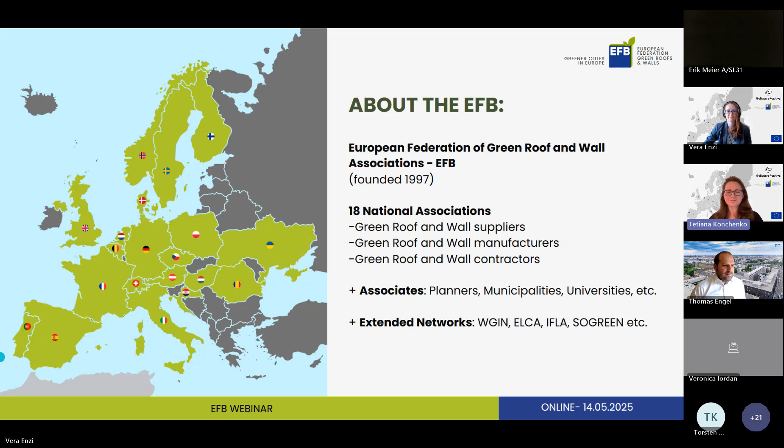Here we can see the logos of our federations. We have 19 countries represented within our networks through 18 national associations, because we have not only national but also regional associations.

Through our national members, we have access to many small and medium enterprises all around Europe. Our national associations have their members - companies, universities, municipalities, and sometimes individuals - altogether more than 1,600 members in total.

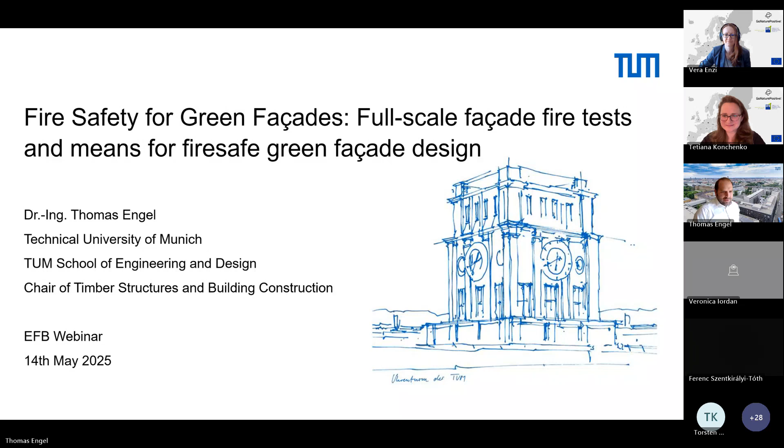Thank you, Tetiana. I hope you could all hear me well. I'm very glad to be here and to talk about our research project. We started about 3 years ago, and at that time there was only very little research in the context of fire safety for green facades. Most fire tests were made in Austria, in Vienna, and 3 years ago we started our research project. We all know that the demand for green facades is very high.

It's increasing - lots of people want to build more green, sustainable buildings, green roofs, green facades, and so on. But we also know that the most critical and serious fires usually occur in relation to the facade. For example, we all know Grenfell Tower or the fire in Valencia in 2024. So on one side we have critical fires in the context of facades, and on the other side we want green buildings - that means we want to put plants, combustible plants, on the facade.

Our question was: is it really critical, and how critical is it? And what are probably regulations and other measures to ensure that we can ensure fire safety, but still be able to build green buildings? At the very beginning, it was very interesting - I'm a civil engineer by background and also a fire engineer.

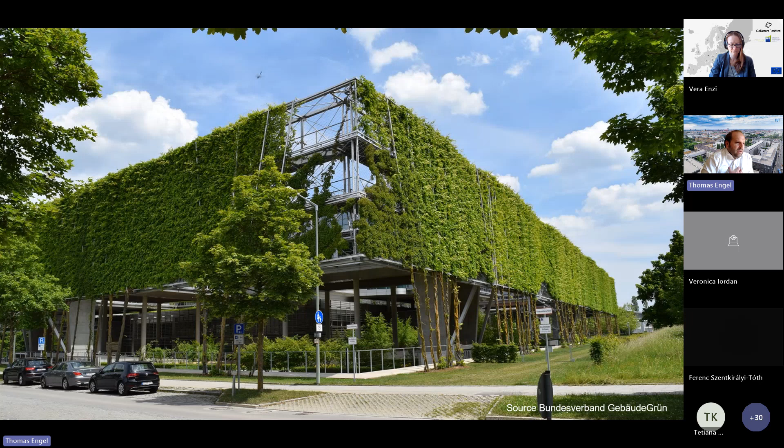I worked a long time in fire research and also fire engineering, mostly with timber structures, also multi-story timber buildings, for example, and so on.

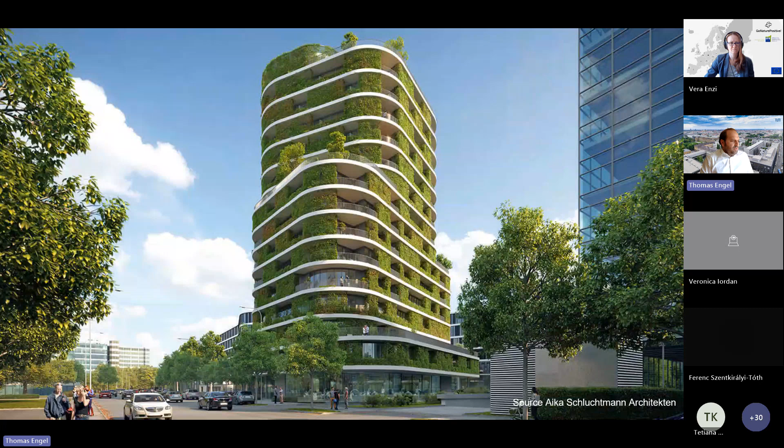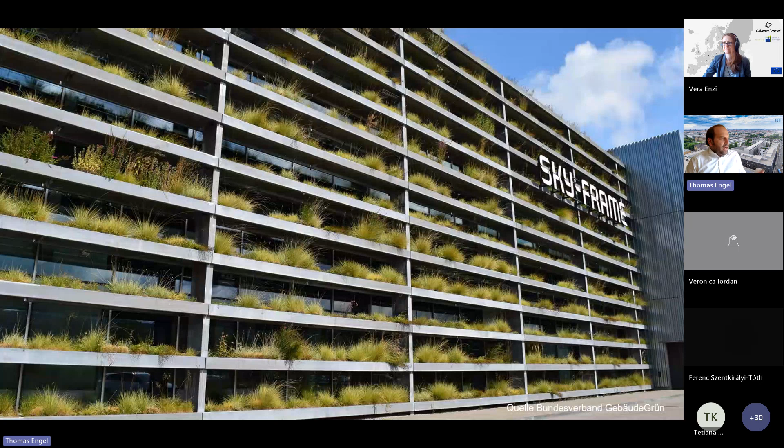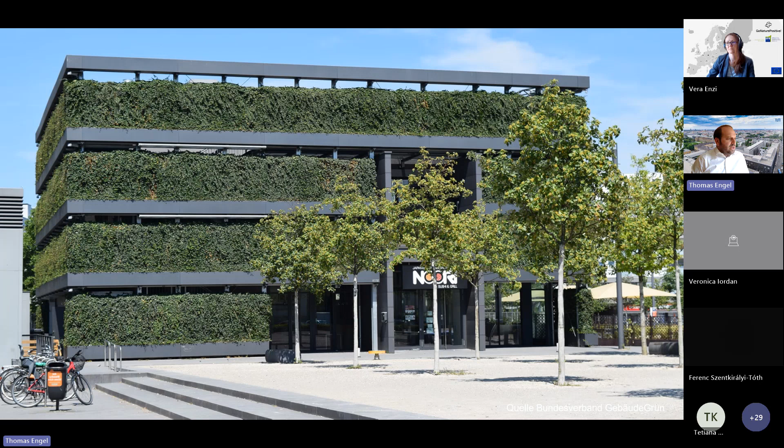In the beginning, we looked at the differences in the systems. You can see lots of green facades, and there's a difference between, for example, a high-rise building with wall-based greening and other things. But on the other side, we have only small plants, a bit like balconies - for example here we all know it probably from Italy. It's more plants on a balcony than a real green facade, and this is mostly hedges in front of a building, not really a green facade.

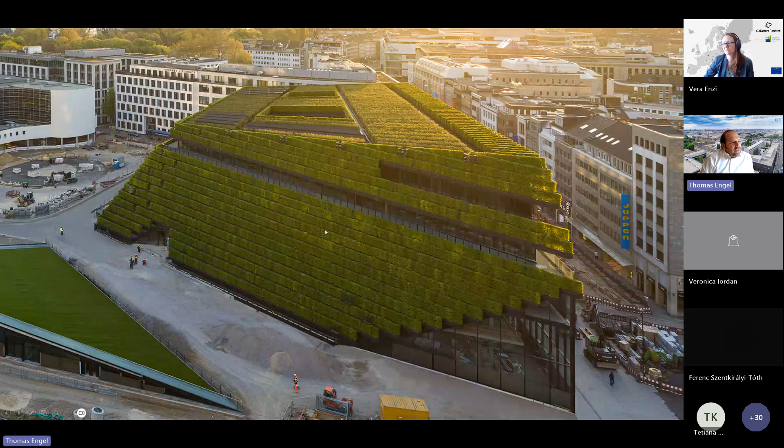For example, in the picture from Germany there are also lots of hedges on the roof, and although you could say it's on the facade, or probably the same, it's also a roof, mostly like a wall, but with lots of green. But is it really a green facade? So at the beginning, it was very interesting for us, but it was also very important for us to determine what is the right system to focus on, and how we can investigate these facades in the context of fire safety with our fire tests.

We made these fire tests with public money, so it's very important for us to investigate in a product neutral way. We want to establish general principles and not to put money toward one manufacturer.

At the beginning, we focused on climbing plants on trellis or climbing aids. The reason was, first of all, it's the mostly used system, and it's the cheapest system. In our opinion, with lots of fire tests and other things, we were able to ensure fire safety in a product neutral way with general principles.

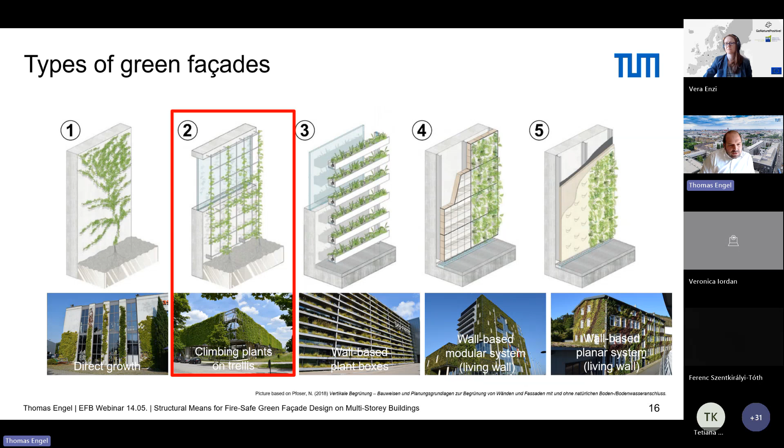In the beginning, we made lots of fire tests because we wanted to know: is there a difference between plant species? For example, does a plant that's 5 years old burn differently than a new young plant? And is there a difference between summer and winter, and so on?

So is there a difference between these species? That's really important—do we need to ensure we only use some species? Is there really a problem with essential oils, for example? In the past, there were lots of discussions about plants in the context of green facades, saying do not use plants with essential oils. So our point was to investigate: is this really a problem?

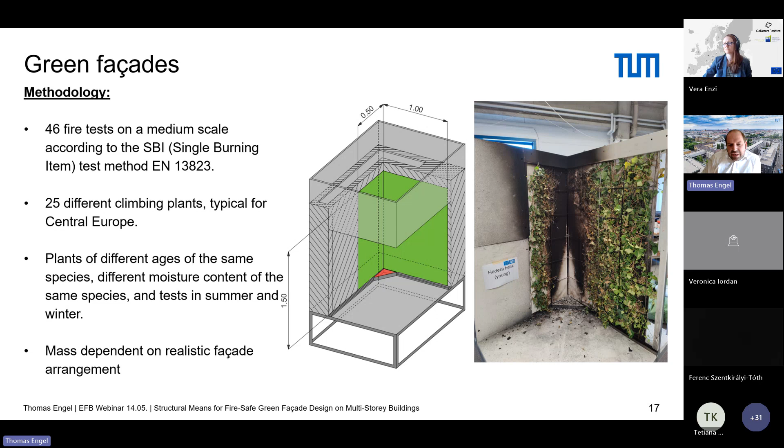But it's important for us because we see it's a very short duration. So in the next fire test, it was very interesting how critical this short duration is. Is it enough to break a window, for example? Or is the heat flux high enough, because of the short duration, to ignite combustible building materials?

We can conclude that the plant species is not relevant in the context of facade fire. The same goes for essential oils, and the same for differences in age—5 years older or 5 years younger plant—when it's maintained, there is no big difference. We tested lots of plant species typical for Central Europe, and in our opinion there's no difference among these species in the context of a facade fire.

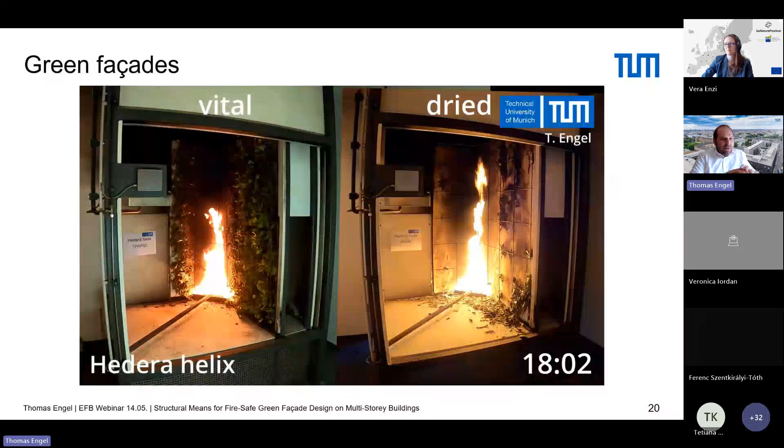That means not when we would be a wildland fire researcher, there is a difference, but in the context of a big facade fire, there is no real difference.

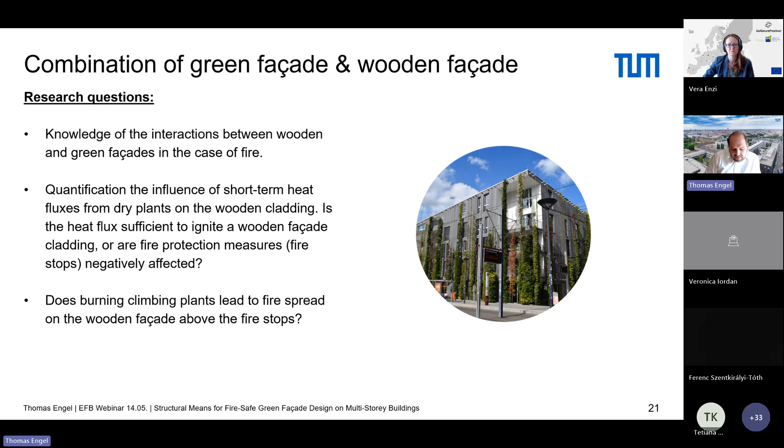On the other side, we wanted to investigate, we all know we want to build with timber. In the past, I made lots of fire tests and fire research in the context of multi-story timber buildings. So it would be easy to combine these topics.

So we have timber buildings with timber or wooden facades, and also we have green facades. Our central question was, when we combine wooden and green facades, is there interaction that occurs in the event of fire? That means, is the heat flux of these green facades high enough to ignite a wooden facade? It's interesting because when we work with wooden facades, we have fire stops, floor by floor.

In every floor we have steel sheet fire stops that slow down the fire spread along the facades. So now when we put plants in front of these fire stops, the question is: the burning green facade, and it could be more green than in this picture, is the heat flux high enough to ignite the wooden facade? It means, did we have a fuse effect, so the fire spread is faster than without the plant?

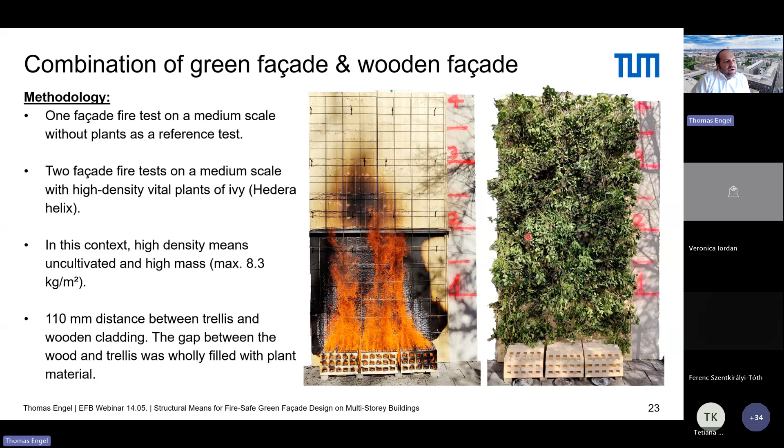We also made lots of fire tests there, and I only want to show the results. These systems both have a fire stop. You can see we put a lot of green on the facade. It's not a well-maintained facade — we want to build up the worst case scenario and have the critical point.

And after this, we have these systems. That means we have a little bit of charring, yes, but there was no independent ignition, no independent burning. So in result, a burning plant, lots of burning plant, a burning green facade — it's not the heat flux high enough, when normally maintained, to ignite a wooden facade. So it's possible to combine these systems.

Especially in Germany, we have special regulations for wooden facades on buildings up to 8-9 stories. It's common to use, but we have the fire stops, and it's possible to combine green facades and wooden facades.

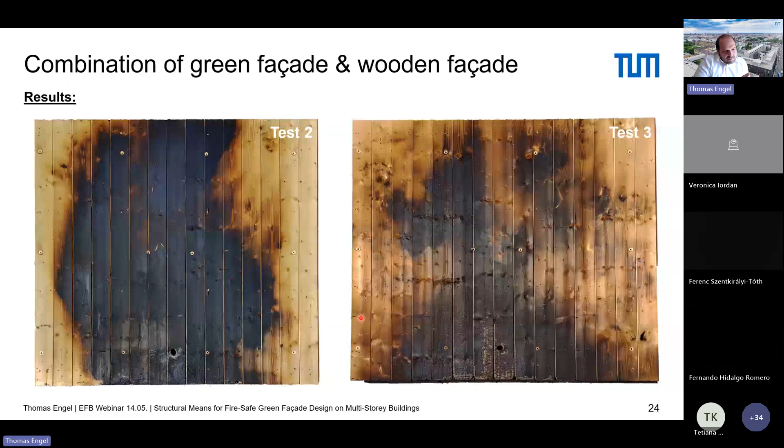I cannot in 20 minutes show you all these tests, but these were at the beginning. We made lots of small scale fire tests, medium scale fire tests, and we wanted to have most of the results, for example plant species and also wooden facades in combination, and so on.

But in the end, it was really important to us to show everyone: okay, this what we made in small and medium scale fire tests works in practice, works in full scale, and there is or there is not a fire safety problem when we use green facades.

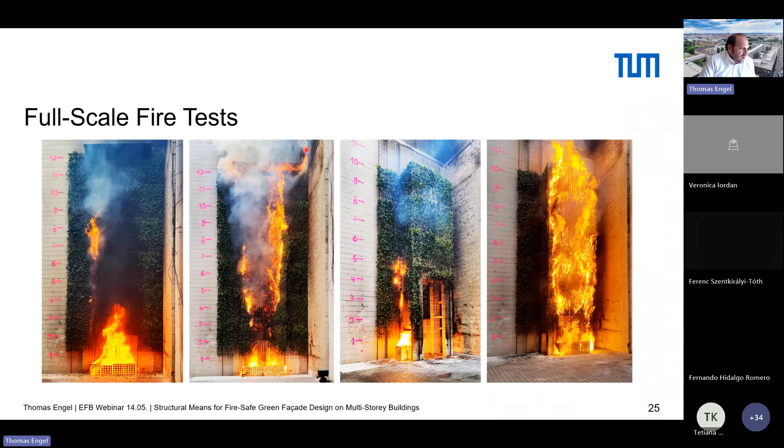So we made lots of full scale fire tests at the end, in total 8 fire tests, also directly on a wall, like on the left 2 pictures, but also on balconies.

We all know that when we talk about green facades, we mostly talk about urban areas. In urban areas, there's not much space due to the high rents, so people use the balconies normally as storage. There's everything on a balcony, and after COVID, it's a lot more. It means from a fire safety point of view, we have lots of fire load on the balconies.

So when we put green facades on a building, it's not the only thing to look at the wall — it's also interesting what effect will take place at the balconies. Is there a burning green facade? Will the fire be able to go inside the building? That's the interesting thing.

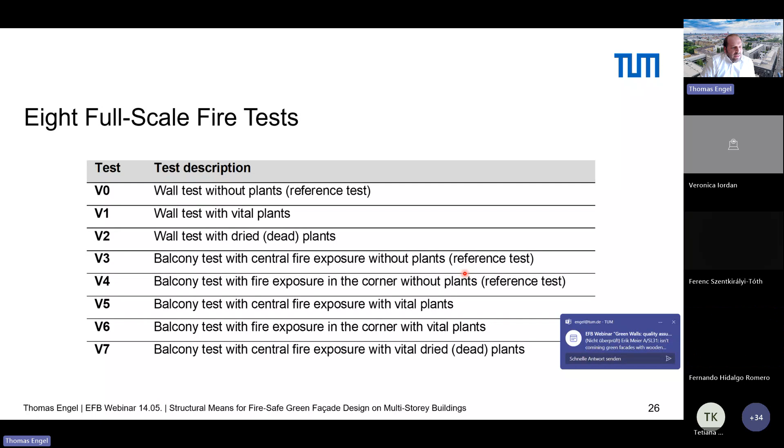So we made 8 fire tests, and I will only show you a few because we don't have enough time to look at all these interesting tests. First of all, we made fire tests up to

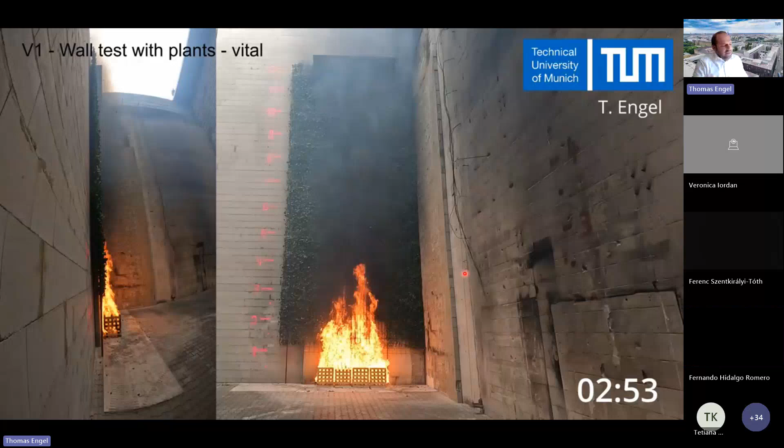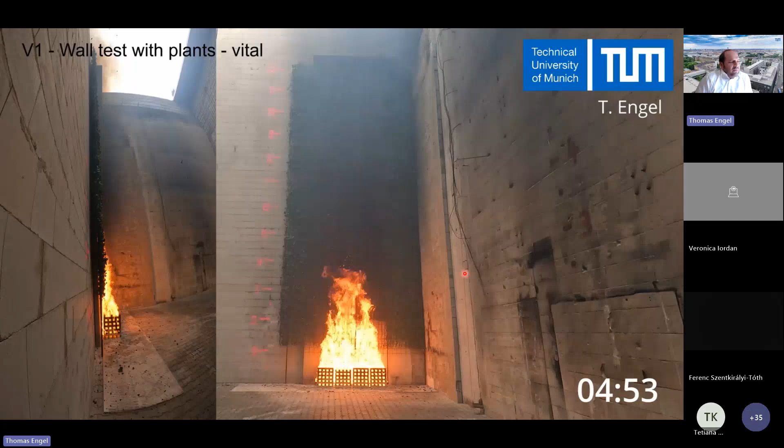12 to 14 meters, and it was a normally vital green facade. It was a maintained facade, though not like a hedge. That's important because when you have a green facade, I will come back to this point later — it's not typical. We see now the flames are burning, and there's lots of fire load at the bottom of the facade fire test stand. The heat of the flames dried out small parts of the green facade.

This green facade later will be ignited and burned down. You can see it in the video, like small flare-ups, you can say. And the interesting question is: is this really a problem for a building?

Everybody thinks when you see this test, when we could ensure that every green facade is vital and maintained, we could stop our research at this point. With these constructs, with these type of facades, there is no problem from a fire safety point of view. So we could stop the research project.

But we all know green facade plants could also be dried. So in these tests, I think everybody could see there's no independent burning. Only small parts will burn down because of the dried out areas, and there's no burning after these areas. It's no problem. You can use it on an 8-9 story building.

But we also have dried plants. That means we put our plants, you could say, like in a heating tent. So it's very unrealistic, it's also the worst case. Normally plants have moisture content about 200 to 300%. Our plants have 4 to 7% moisture content. That means we put them 3 up to 5 days in an 80 degree heating tent, and they were really dried. It's very difficult to put them on the wall without losing any leaves. So it's a really dry green facade.

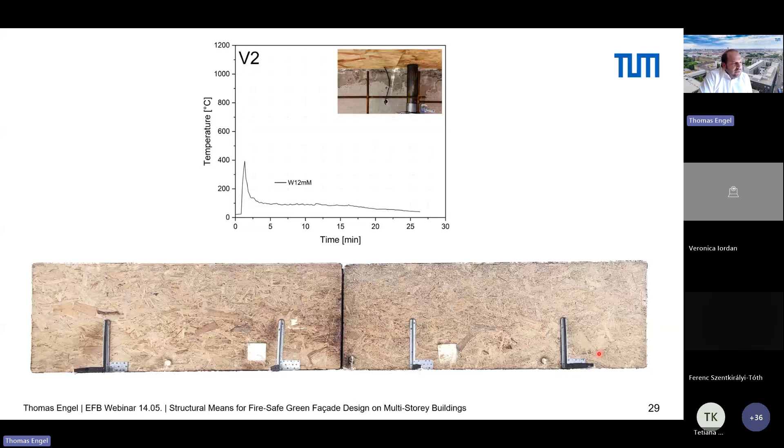It's like the same when you put your finger through a candle - when you only do it very shortly, it's not hot enough to hurt you. It's the same here. We have a very small, very short duration, and that means there's no burning, only a little bit of soot. You can see it here where the measurements are fixed - there's a little bit of difference in the color, so a little bit of soot, but no charring. There was no burning or anything like that.

That is what first of all. On the other side, we also made lots of tests. I will only show you this one. It's also the worst case - it's the balcony test with dried plants, and lots of dried plants.

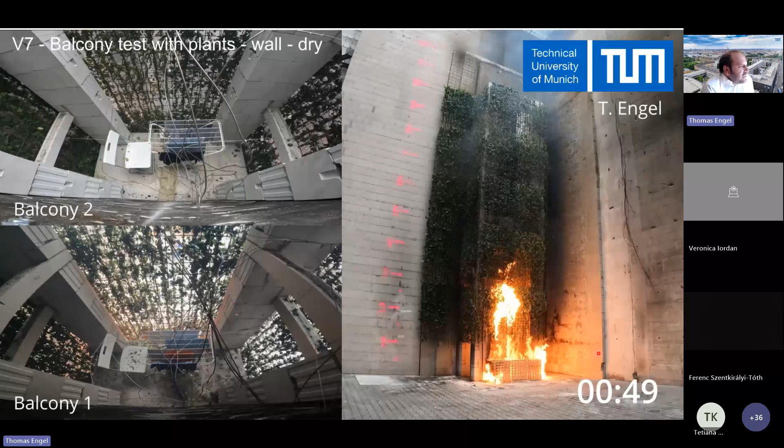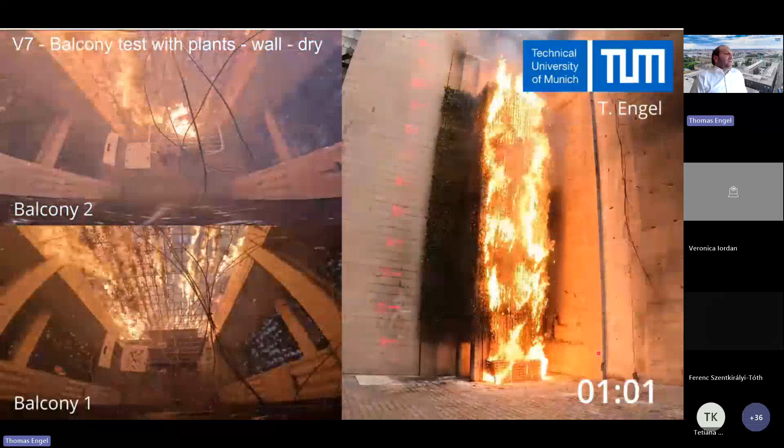So you could ask, why is it like a green prison? Nobody wants to live like this. Yes, that's right, nobody wants the whole balcony in green. But it's common to have one, or probably one meter or less, green stripes, let's say, from floor 1 to floor 8. And though it's the same, we want to build up the most critical worst case scenario, and though we put it completely in green.

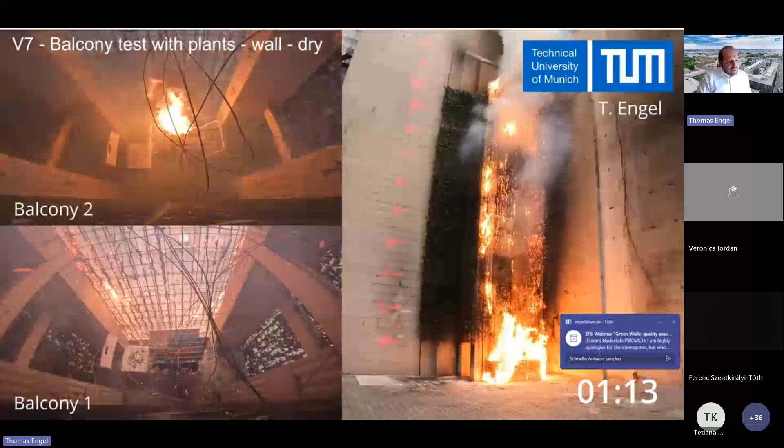And when you look on the right, on the time, it's the same - it's a very short duration. So if it's a vital plant, we have no independent burning, it's no problem. And when it's dried, it's a very short duration.

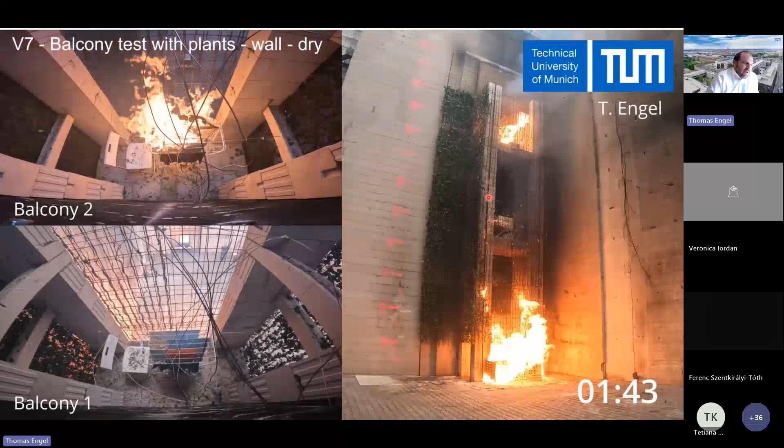You can see we have plastic chairs at every balcony, and also clothes horses. This is burning because we have no top cover over the last balcony, and it's normal that the flame wants to go back to the rear wall, the flame wants to go inside, and there was no balustrade. So you can see there's no protection - the flame could directly go inside the balcony because there's no balustrade.

So it's also the worst case scenario. For us, it's very important we have 300 to 400 measurement devices on every test. So we took, you can see it here, lots of measurement data for us to see how much heat flux will arrive on the rear wall, how much heat flux will arrive here, and so on.

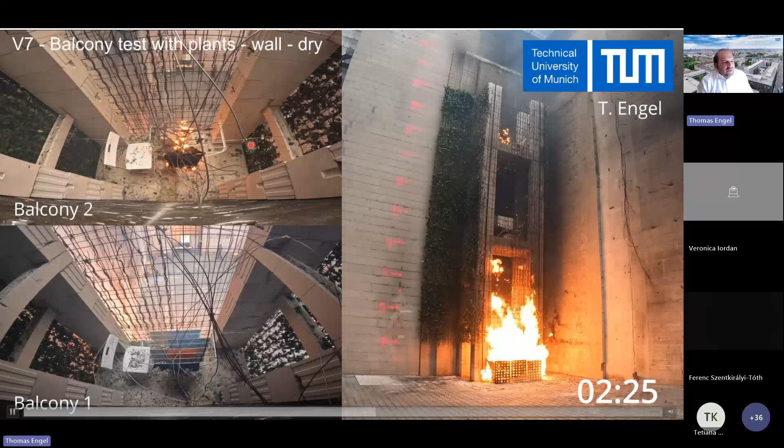It's also visual, you can see with the furnishing how difficult green facades in the context of climbing plants on trellis really are. And after this, we have our conclusion. I have to say the conclusion is both the results of the fire test, and on the other hand, the results of meetings with practical experts. We have a big group of people from the industry, engineers who work with green facades, and we all go together to write down our conclusions.

Not only the conclusion from a fire safety point of view, but also structural, building physics, and so on. And it was important for us to have as few guidelines as possible. When there's no problem in the context of fire safety, we don't want to write down lots of guidelines and things.

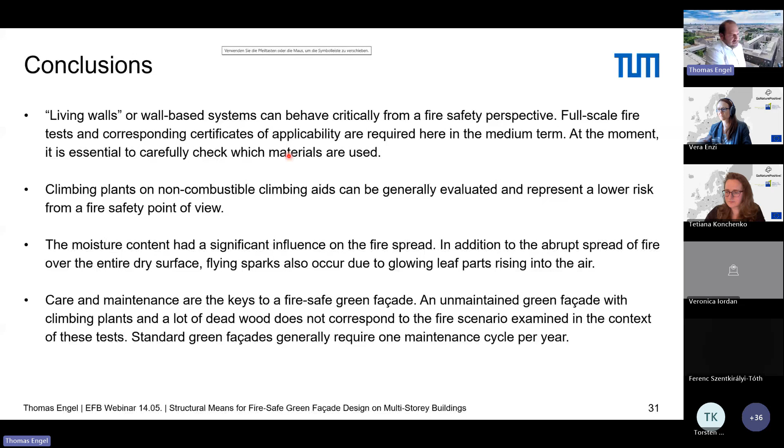So it's only a few points. First of all, for living walls or wall-based systems, we have to ensure fire safety and we have to look at the specific system. I told you before, the colleagues from Poland made fire tests. I also collected lots of tests from different persons or different manufacturers all over Europe and all over the world.

And there are really good systems from a fire safety point of view, but also systems with combustible materials and rear-ventilated facades. We know from the past it's not very difficult to know that combustible building materials in combination with rear-ventilated facades can become critical. I don't want to say living walls are a problem, but they could be. So we have to look and ensure fire safety at the moment, because there's no real test standard for living walls.

For climbing aids or non-combustible climbing aids, it's really important - non-combustible climbing aids can generally be evaluated and have a lower risk from a fire safety point of view. The really important thing is the moisture content. When you have dried out facades, it's more critical. In all of our tests, we used the worst case scenario, meaning our conclusions and results are also worked with dried plants.

And the really, really most important thing - in Germany, for example, we're only discussing at the moment with the building authorities about this point - is care and maintenance. When there's a green facade with one care and maintenance cycle per year, it's okay. But when we have something like a hedge, not a normal green facade, there's a problem in the context of fire safety, but not only fire safety, it's also a stability issue. That means there's too heavy a load, so we have to ensure care and maintenance, and that is the most important thing from our investigations.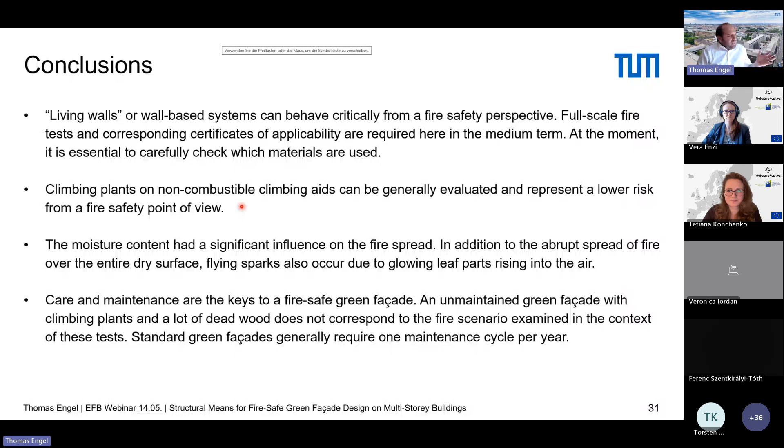And we made lots of tests, so we know something about the flame, but we also know in general it's very important, for example, for the fire department - we also have lots of participants from fire departments all over Germany. Every green facade which is vital is self-extinguishing. When it's not vital, when it's dried out, it only burns a few seconds, and then later it's done. There is no still burning, meaning the fire department does not have to reach the facade and extinguish at specific points.

When it's normal and maintained, it's the same - it's very important that it's maintained. It's not a hedge, a hedge will be different. A green facade is very good from a fire safety point of view. That means self-extinguishing is a really nice thing about green facades.

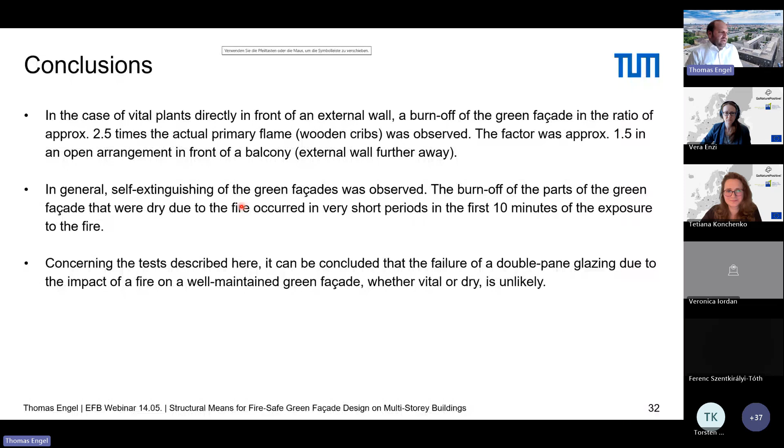And we made only a few rules. For us, it was important with regard to the test data to have 500 millimeters between a green facade and a window. That doesn't mean it's to break the window, but when the window is open, it's possible - we need a distance of 50 centimeters or 500 millimeters between a green facade and a window.

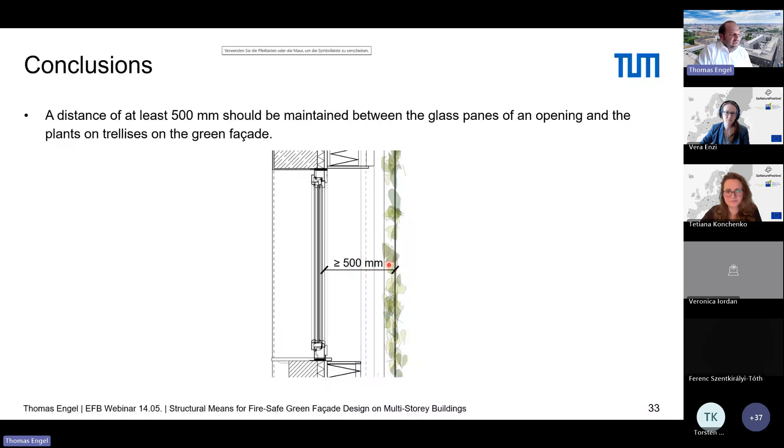On the other side, that's not only a fire safety point, it's also, for example, for building construction - we do not want our green facade to go inside our roof or our facade.

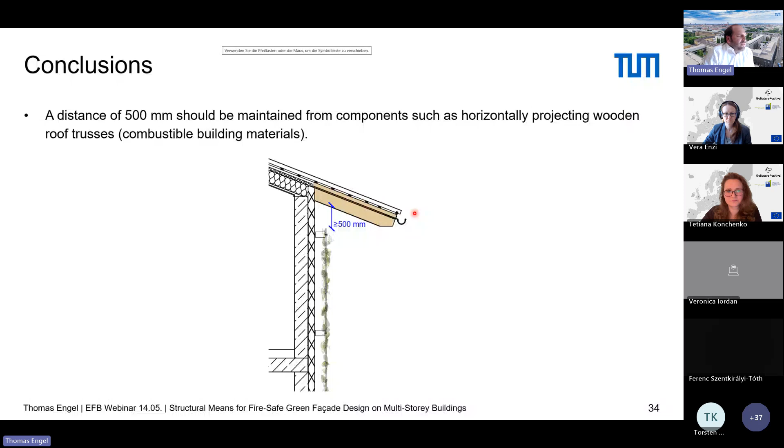So we have a distance of 500 millimeters between combustible building materials like roof trusses and our green facade. And on the other side, we have non-combustible climbing aids, which is really important. On balconies, for example, you see it in the video, we have to use closed balustrades, meaning normally balustrades but made of non-combustible materials and closed, so the fire can't reach inside the balcony.

And for wooden facades in combination with green facades, at the end, the conclusion was that we need at least 15 centimeters, or 150 millimeters, distance between a wooden facade and a green facade.

And in the end, it was a whole thing, we made lots of tests, but in the end we came to the conclusion that a well-maintained green facade with climbing plants on trellis is not really a problem from a fire safety point of view.

The really important thing, and that's a big discussion at the moment, for example in Germany, is how we can ensure care and maintenance so it doesn't become a hedge. When there's a difference between a normal green facade and a hedge, it will be really different for everybody, and it's a different fire load. That means it's not the same as what our tests are focused on. It's different. The really important point is care and maintenance.

Everything else is not as big a problem in the context of fire safety. So you can say that at the end. I thank you for your attention, and I'm looking forward to your questions.

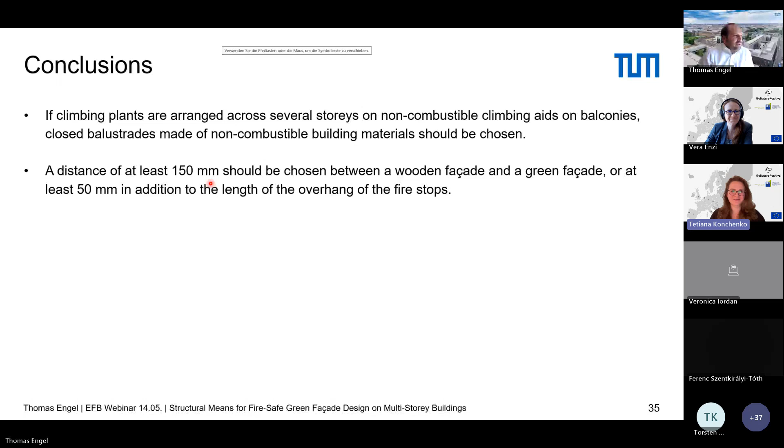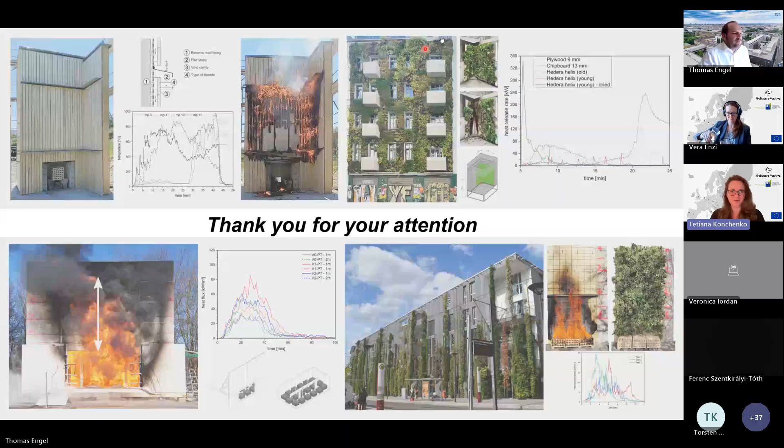Great to hear and see the person who really burns these facades, so the regulations, standards, and conclusions are made right. We have some questions in the chat, but we will wait until the end of the webinar. After Vera's presentation, we will have a Q&A session.

And I would say my first target is to give you a bit of framework, also why that's actually happening. Tetiana already told you about our great project called GoNaturePositive. It's funded by the European Commission. It's actually a 4-year project where we are really working on the economic change of the current situation. We try to look at different sectors, also the building sector, and how it could potentially change to be nature positive. So we're especially looking at opportunities of green buildings in that sense. In case you want to check out the project, please go to GoNaturePositive.eu and get your share.

What we've been doing so far in this project is we have written a concept note on what a nature positive economy is, who delivers a nature positive economy, and how it could be implemented. The direct link to today goes back to last autumn when we had a really nice webinar on mainstreaming green buildings across the EU. So we were thinking, what's the roadblock currently? Why can we not scale as fast as we expect? And one of the potential identified drivers was standardization of technology. So this is where we arrive at today's point.

In case you're interested in rewatching this interesting webinar, you can do so. From today's viewpoint, the GoNaturePositive project is doing a lot of stakeholder consultation, expert roundtables, policy dialogues, interactive formats, surveys, interviews, training, and capacity building in the field.

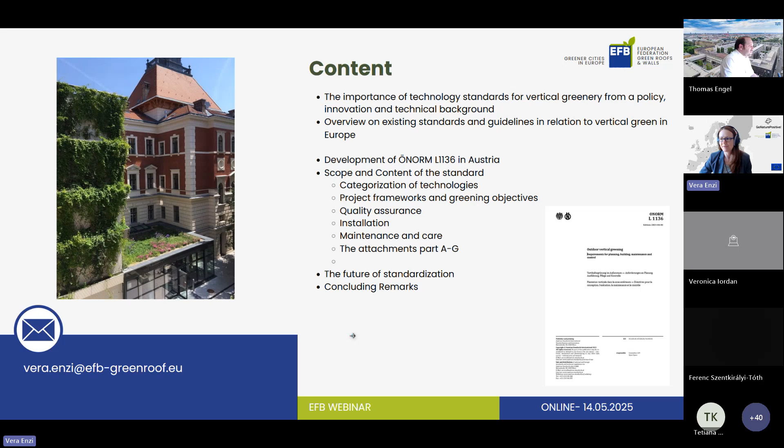Coming to today's main topic, the Austrian Standard ÖNORM L1136. So what's the content of the next potential 15 minutes? I'm going to have a few thoughts about the importance of technology standards, also for vertical greenery. I'll give you a quick overview of what exists from a European perspective in vertical greenery, and then we'll take a look at the standardization example from Austria. I'll give you a quick overview of the content you can expect from this standard, now also available in English for purchase, which is a very, very big step. We'll have some concluding remarks, then see what questions you might bring to the table.

One of the first reasons why standards are important, especially now, is that in our field we see a lot of ongoing implementation of EU policy that should lead to technology mainstreaming. For example, the EU Nature Restoration Law should revert the loss of urban green spaces. The Energy Performance of Buildings Directive, EPBD, addresses measures on green infrastructure for renovation plans and increasing energy performance of buildings by installing green roofs and green walls, also harmonized with investments in solar energy on buildings.

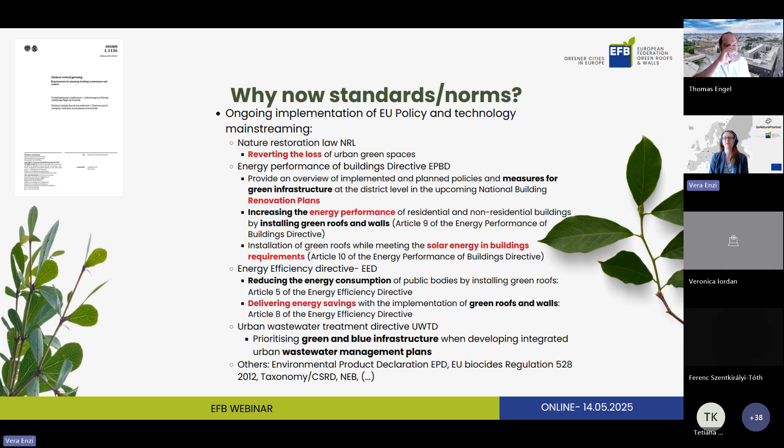Then there's the Energy Efficiency Directive, EED, which should reduce energy consumption in public buildings, especially focusing on greenery on roofs and walls, delivering energy savings through this technology. We also have potential in the Urban Wastewater Treatment Directive, currently in implementation, about wastewater management plans and how green spaces and nature-based solutions can contribute. I won't bore you too long, but the Environmental Product Declaration also plays a role for standardization, along with the EU Biocides Regulation, Taxonomy, CSRD, and the omnibus activity linked to sustainability reporting, and the new European Bauhaus. So there are a lot of good reasons to get our sector - green roof and green wall, the green building sector - ready.

We need these standards now in order to bring European policy to a national level, and probably fast. Also, why standards and norms now? We've been doing a lot of green wall projects already, and sometimes something can happen. Then there's a big question: how did it happen, why did it happen, can we avoid it in the future?

Unclear competencies and responsibilities are one of the main issues why a wall could fall dry - that wouldn't be good for you. But also maintenance knowledge issues, like not cutting for years, then cutting the parts where the plant is still attached to the building, a little wind event, and the wall comes down to the street. Or simple planning mistakes, putting climbing plants with growth like an elephant's leg on a thin stainless steel rope of 2-3 millimeter dimension - that's not a good thing to do. So we can make mistakes, and the standard helps set a minimum basis and understanding for a sector, so these things probably don't happen.

To my understanding, another very important point on why standards and norms are important - not just in Austria, but in any EU country - is innovation and the future, because we need a baseline. You just saw the EU policies and directives we're currently working on to bring to a national level, and a lot of questions come with this.

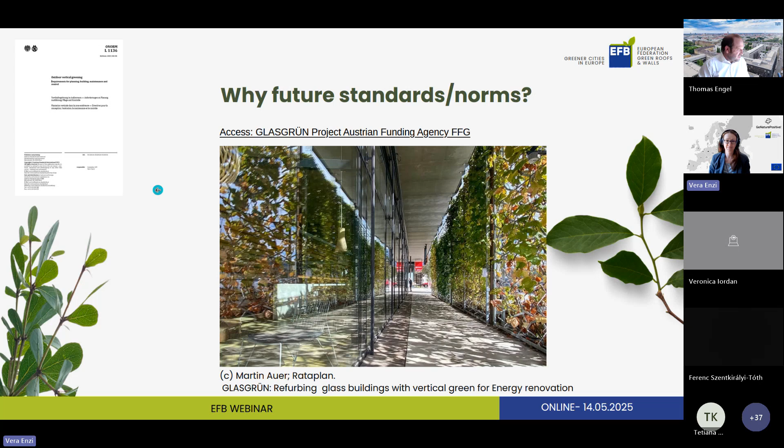I'll give you a nice project example here, currently happening in Austria. It's called Glasgrün, and it deals with refurbishing glass buildings with vertical green for energy renovation - how a green wall can shade the building and contribute to energy efficiency and energy savings effectively, and how it can be standardized.

A second, what's going on? I'm going back, now I'm going front.

Second example, why standards will also be important in the future: vertical greenery. On the left side, the picture from 2012, an over 80 years old Parthenocissus tricuspidata on a heritage building in Vienna. On the right side is the picture from 2025. This whole building needed a renovation—windows, facade, roof, an energy-concerned renovation.

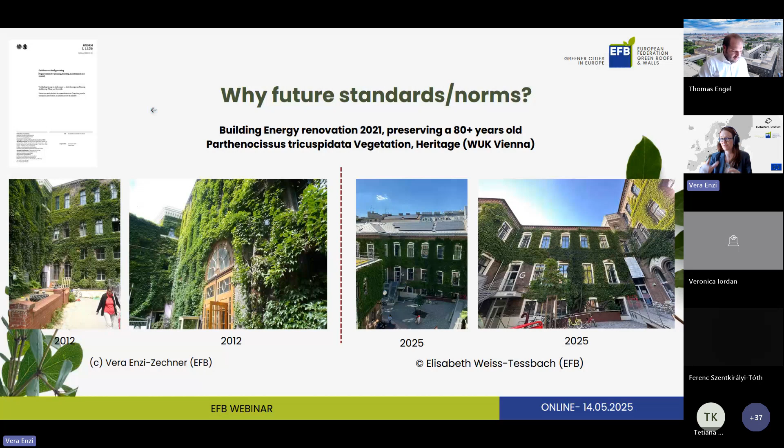It was possible to keep this very old plant. We can ask ourselves, if we just dig it out and replant it, how many years or decades will it need again to cover the space and provide microclimate? These kinds of things are important and could be future integrations into standards. We are always moving, and especially the vertical sector is developing fast.

Standards, norms, guidelines in Europe—a quick overview. You will get some links in the chat. Apart from our standard, published in 2021, there are guidelines in Austria, for example the Green Wall guideline of the city of Vienna, coupled with a best practice collection. There is also the fire protection technical requirement paper.

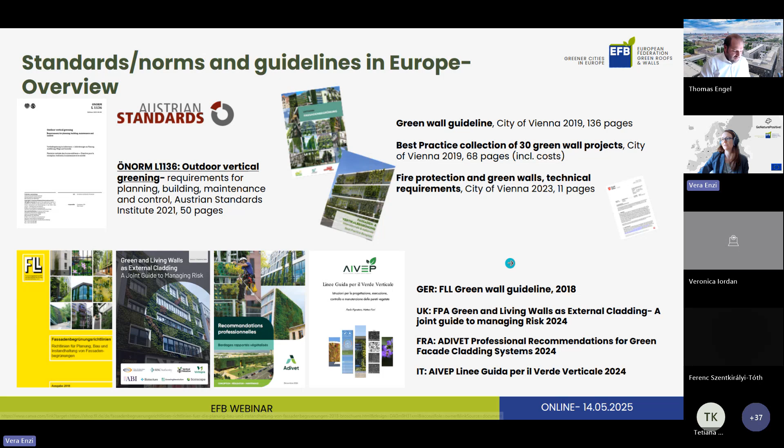There's also the German FLL guideline from 2018, which Thomas already cited today. But we have seen 3 very recent publications on green walls or vertical greenery: from the UK, for example the Fire Protection Association's guideline to managing risks of fire, published just last year; in France, the professional recommendations for green facade cladding systems; and also in Italy. You will receive the links so you can take a look at these documents.

ÖNORM L1136 is an Austrian standard. Its home is the Austrian Standards Institute, which to my understanding is, from a European context, a very far advanced and innovative institution.

As VfB, the Austrian Green Roof Association, we have a long-term cooperation with the Austrian Standards Institute—already for 30 years we've been involved in standardization processes. It started with green roofs quite early. This standard is now being updated, and it will change from the L standardization environment, which is landscaping, to B, the building. In 2017, an indoor greenery, vertical indoor greenery covering standard was launched, and in 2021, the last part, outdoor vertical green.

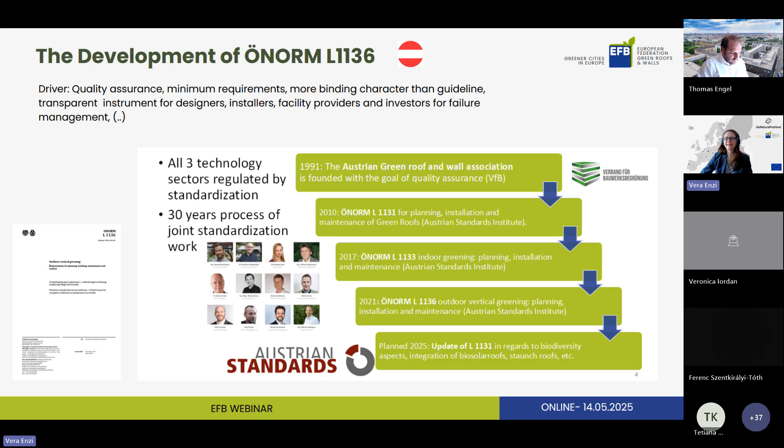So what's the scope of application of the standard? It applies for design, installation, maintenance of durable perennial vegetation on different kinds of walls and facades outdoors. It also covers greening with plantainers placed next to walls or mounted on walls, besides living walls and ground-based climbers. It can be applied to the greening of pergolas, dry stone walls, gabions, noise barriers, etc., with an inclination of 30 to 150 degrees.

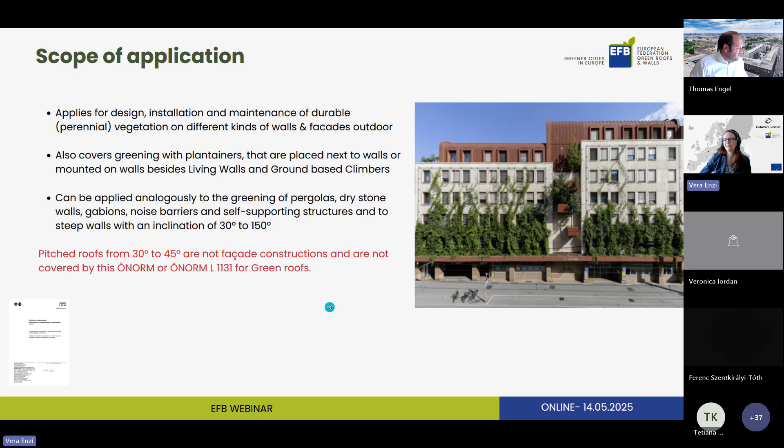The only part basically not currently covered by standards is pitched roofs from 30 to 45 degrees—neither in the L1131 nor in the L1136.

Content-wise, the standard has 50 pages, fully packed. The first part is about categorization—how many different kinds of systems do we have and what are the specifications. The second part is design, then installation and maintenance for the different categories. The last part is really important because it contains a lot of mechanisms on how to evaluate the development, plus other supporting materials for management.

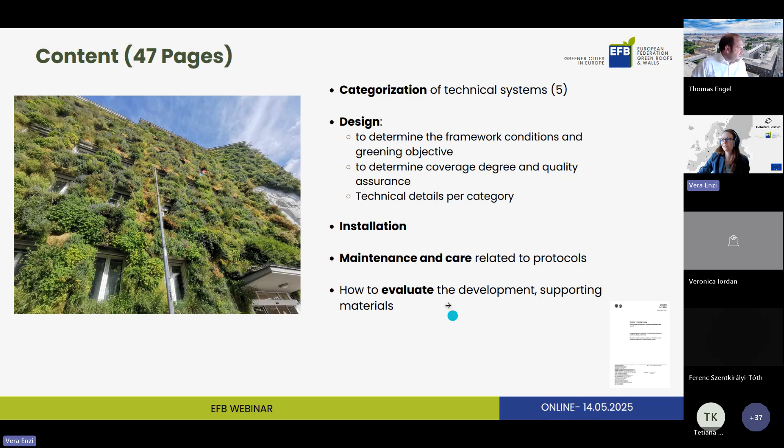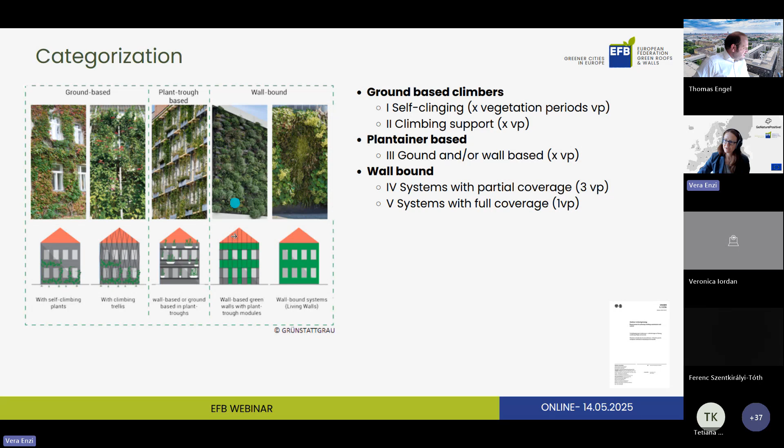This is quite the same as what Thomas said already: we have ground-based climbers, self-clinging and with climbing support, in categories 1 and 2. There is a planter-based category, number 3, which can be ground or wall-based. And the last categories, 4 and 5, are living wall systems—one version with partial coverage and the second with full coverage.

The interesting thing about this standard especially is that it comes along with a project framework. The first part is about how to define and set site conditions for a project, and why site conditions are important. We already had the question earlier in the chat about whether you should, for example, put an ivy wall on a north-facing facade of a wooden building. Really good questions—and with these kinds of questions, the different site conditions, from a climate and weather specific perspective to a building specific perspective to a plant specific perspective, can help set a transparent and correct framework for a project.

I will not go into all the details.

You can really already see that this norm is quite packed, and it brings in a lot of things that must be considered when designing and planning a green wall on the building.

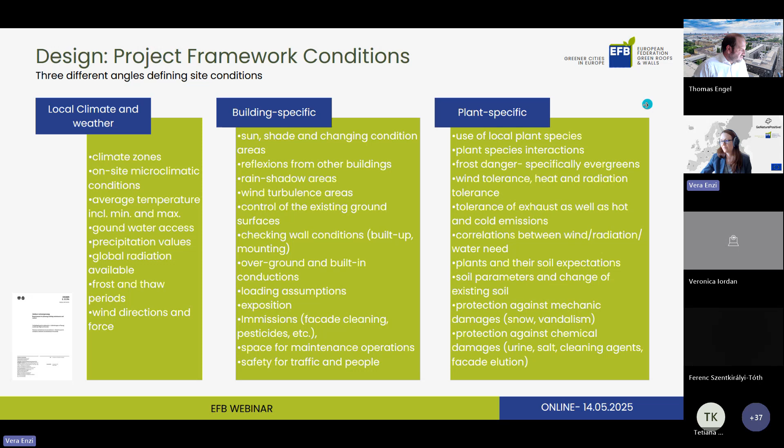The second part that I also find quite innovative, it's a standard that sets greening objectives, covered by a well-explained process. It covers the phases of design, installation, and maintenance, and it agrees that there is a coverage that needs to be reached in the project, coverage of plants.

It also defines when the greening objective is reached. So it comes along with a timetable with certain milestones on what development to reach when, which is of course bound to the planting plan.

So when defining the greening objectives, you have input parameters like the total green surface, some ecologic factors like the number of species, design objective, microclimatic performance, economic factors, building physics, and other influence factors like the growth rate of the plants, the category, local site conditions, maintenance and care.

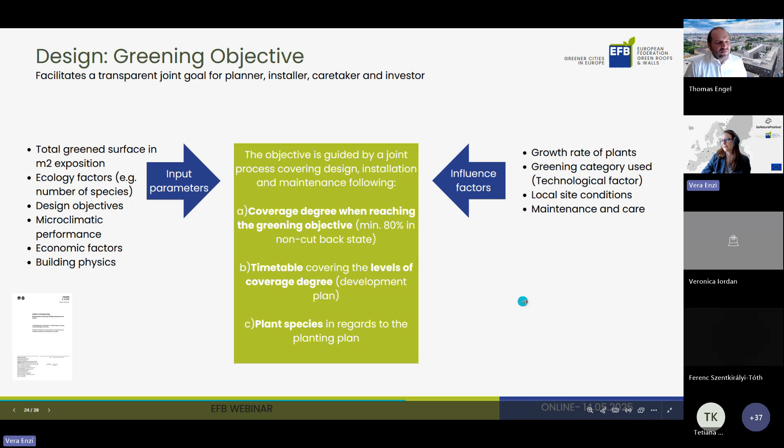The design also comes along with a coverage ratio. The standard says a theoretical coverage ratio of 100% means that the area to be greened is projected to be completely covered with vegetation and the underlying structure is no longer visible. You can evaluate the coverage degree with a picture analysis.

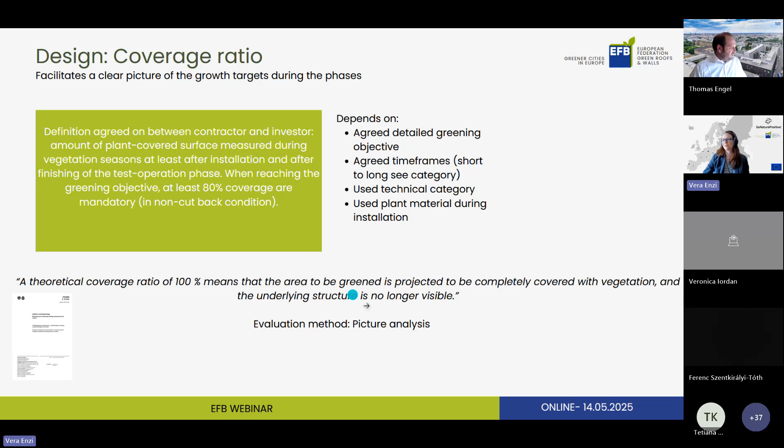And of course, in the design section, there's also a lot of other different factors. So what kind of walls are suitable for greenery, what quality requirements for construction materials and materials performance also would we find. It sets rules for the statics of fixtures and fastenings. It refers to the OIB guideline number 2 in terms of fire protection.

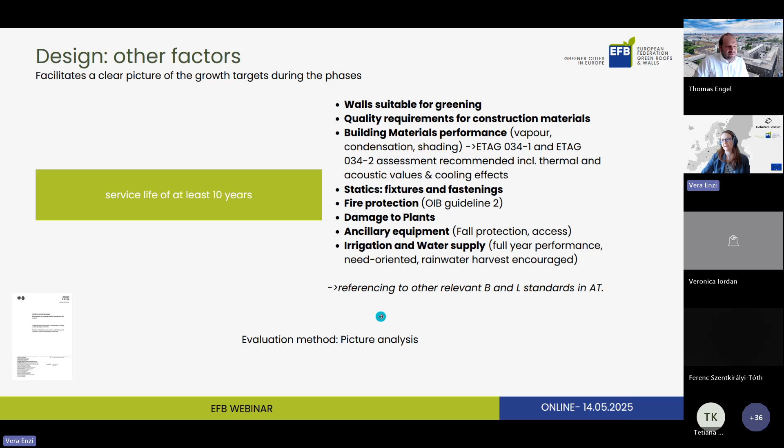And of course, it also treats irrigation and water supply on a full year performance need-oriented way, and it encourages the use of rainwater. And of course, you will find the necessary references to other B and L standards in Austria. The life service of at least 10 years must be covered.

The installation and maintenance care chapter is quite large. It's set up in a way that these topics are treated per category.

For example, what you can expect, browsing it, you will find a lot of technical specifications, for example, for plant containers and systems and trellises. What the materials, what resistance class materials must bring, for example, against UV, frost, statics, root pressure, corrosion, solvent surface coating, etc.

Quite interesting also included plant container minimum volumes and height. For example, one table that I brought from the standard, you can see it here on the right. So already there is a vegetation form and there is also a minimum installation height in terms of the plant container and the minimum volume of rootable space in liter per plant.

This is not just available for climbing plant walls, but of course also in relation to category 4 and 5, which is the living wall categories, where it also sets basically a minimum of 1 liter per plant. And if there are woody shrubs involved, it goes up to 3 liter per plant.

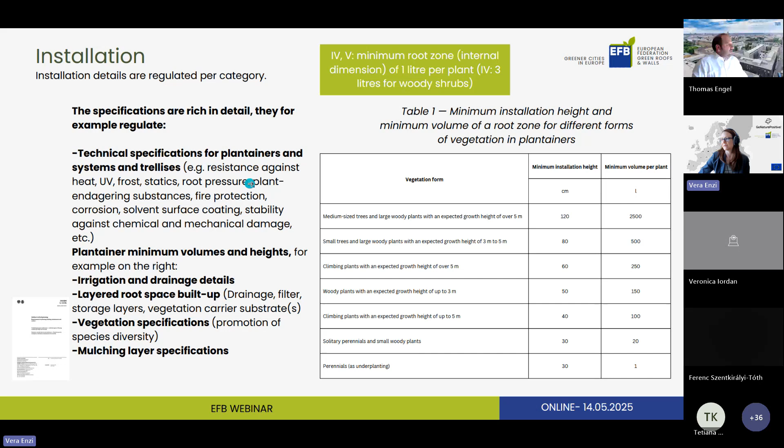It's actually specified in another standard, the L1120. And following this phase of development maintenance, the ongoing preservation maintenance and care work starts.

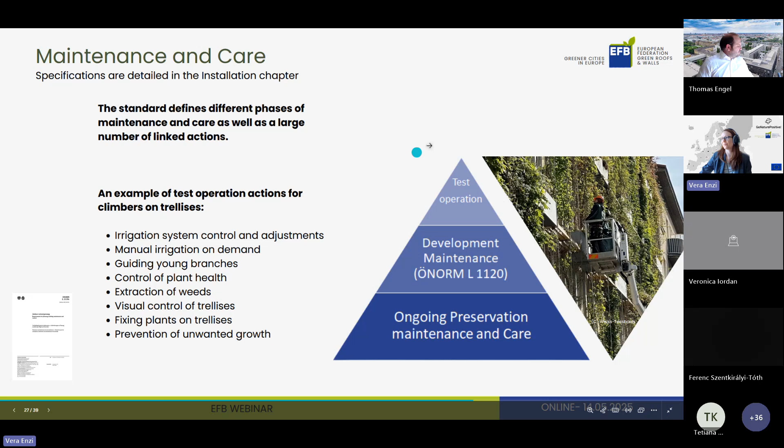So what you can expect from the standard is that it brings you test operation actions for these different phases in listing, supported also by protocol documents, which brings us to another important point.

Quality assurance and data availability is also a clear commitment of this vertical greenery standard. It stands for object documentation, which also comes along with a long-term concept, of course, for technical maintenance plan, preservation care plan, and periodic visual control.

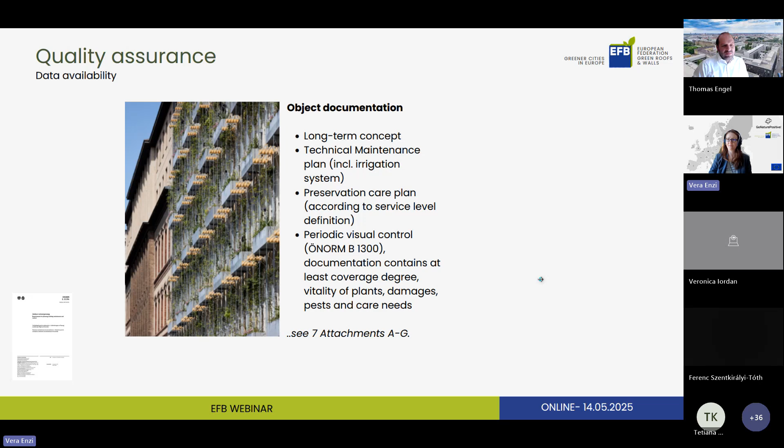Which is a case, of course, not just for green walls, but for a lot of different other standards and standardized technologies as well. And in especially this section, there is a reference to the attachment A to G of the standard.

And I also brought you some examples so you have an idea of the attachments to the standards. Attachment A is additional information regarding potential greening objectives per category that couldn't make it into the full body of the standard document.

Attachment B shows potential coverage degree developments per category. For example, here you see how this coverage degree, or coverage factor, can develop.

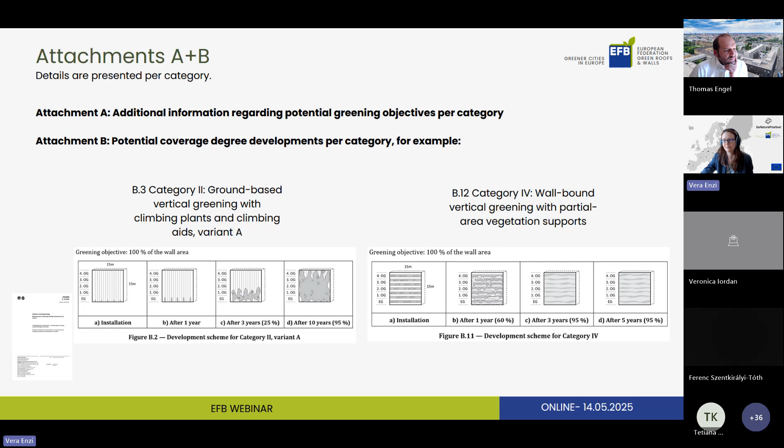On the left side, you see a ground-based vertical greenery with climbing plants on climbing aids. On the right side, the same illustration for category 4: a wall-bound vertical greening with partial area vegetation supports. This could be used to establish a clear maintenance protocol on a timely schedule.

Attachment C provides technically relevant evidence for contract design between the different parties, covering installation, maintenance, care, time planning, etc.

In attachment D, it's about the contextualization of specific offers, covering the takeover after installation and the final inspection. Also, a visual example I brought here was attachment E.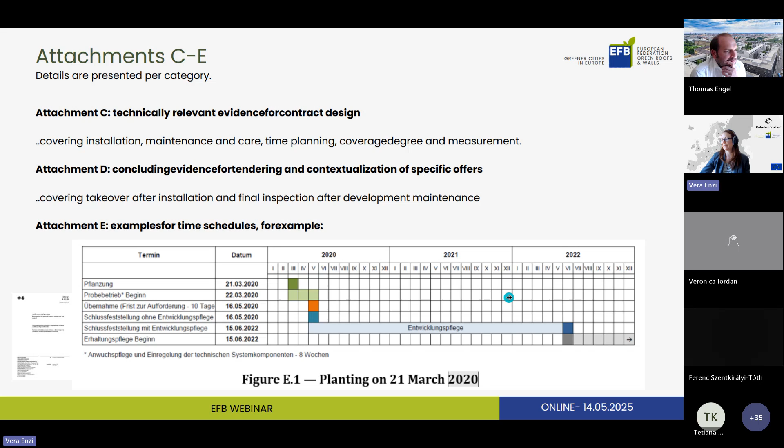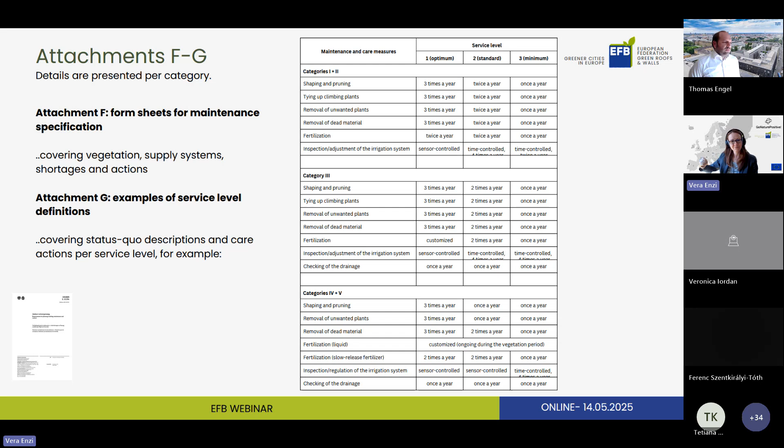A service level agreement, for example Thomas, would make sure that a wall gets the care it needs, and the risk that it can fall dry is avoided.

Shortly after this standard, this is why I also wanted to share this information with you: the Austrian Green Roof Association, together with GrünStattGrau, implemented a seal of quality for companies. So a company must work according to the presented standard, not just this one, but also the roof and indoor greenery standard.

The company must at least invest 20 hours every 3 years in certified training for their employees on green buildings, and they must have a valid horticulture business license.

And of course, a lot of projects that they hand in are being checked before they are awarded the seal of quality, which should help investors see who is really working with the standards and who has broad knowledge of them. So I think this is a nice addition to the standard.

Coming to my conclusion, because I think we are running late in time and we still want to discuss.

The future of standardization. Some of you have probably followed the development from last year, where the European Court of Justice ruled that harmonized technical standards are part of EU law and must therefore be freely accessible and free of charge. I personally thought this was very good news.

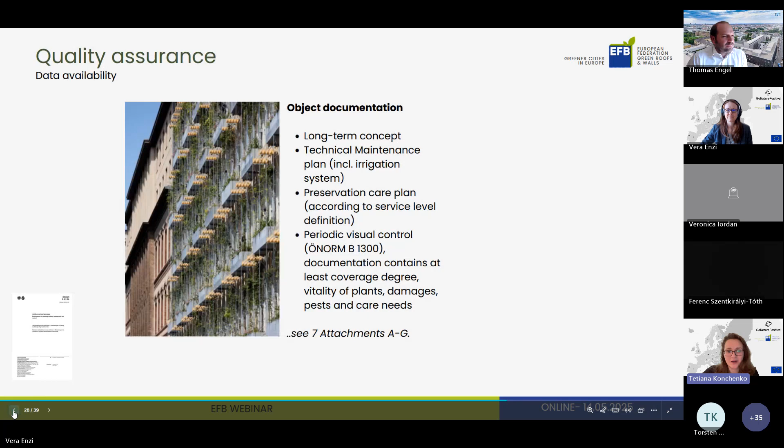First question: how difficult was it for everyone to start complying with the legislation in Austria, from the moment the laws came into force until they were actually followed?

Haha, that's a good question. I would say, this standard is still quite new, let's say we now have 2025, it was published in 2021. The development was actually translated to English quite recently, it just came out at the beginning of this year in English. Yeah, a standard always needs time.

From a VFB, the Austrian Green Roof and Green Wall Association, perspective, our members know this standard and they work with it. Horticulturists, planners, landscape architects with a direct link to our association have the knowledge. They also have this document on their desks and are working with it. But still, it needs some time until in general the building industry, larger contractors without specialization on the topic, architects and planners without specialization, start with their first project because our cities are demanding it.

We have cities in Austria that have quite strict policy implemented, where existing buildings and new buildings must get vertical greenery. I would say the uptake is there, so we also see growth in members and companies and firms working with the standard, but it could be faster.